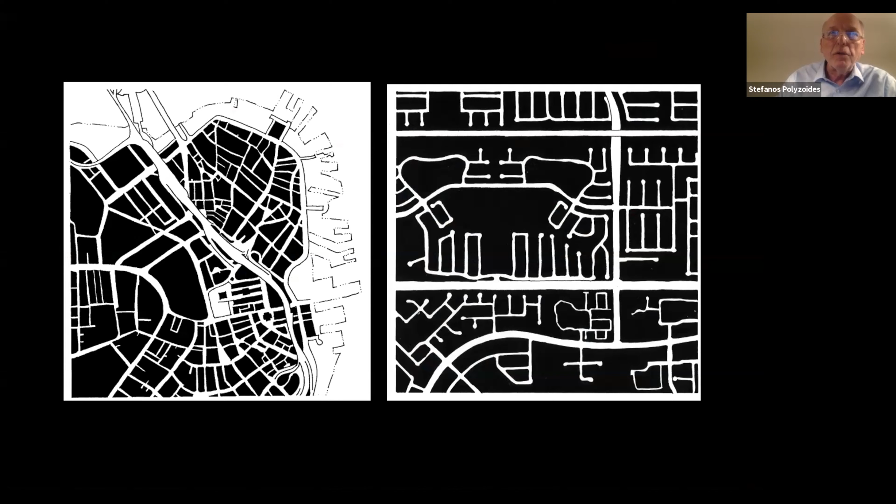So this image is 1 year older than I am. So basically our environmental issues, challenges, opportunities, and disasters in the United States are as old as the oldest people in this room today. This is an important vision, which was very rudely upset by a number of developments in our society that had to do mostly with cheap money, fast construction, emphasis on moving, abandonment of cities, bias of all kinds, and the making of cities that are not meant for human habitation.

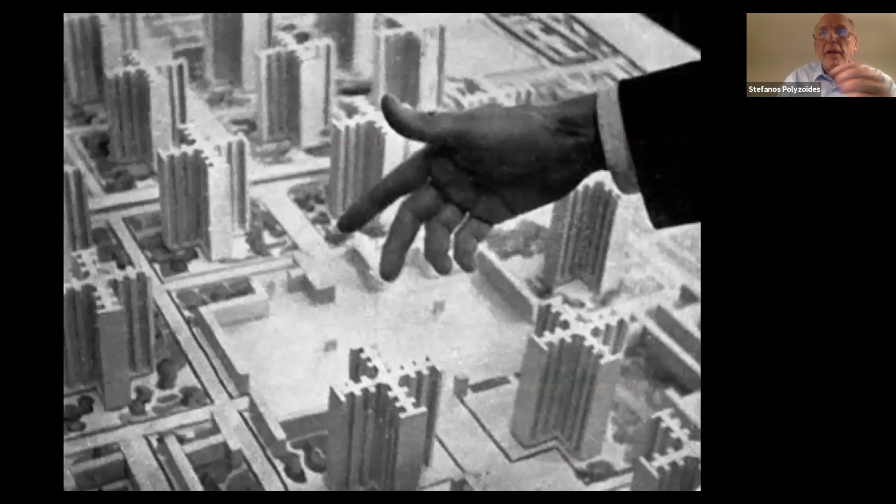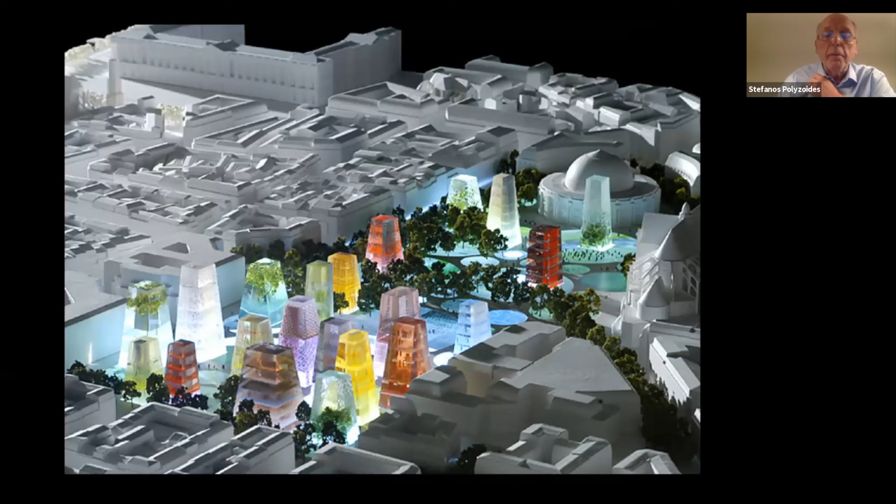What we're left with, I think, are the derivatives of this process, and our cities, which are mostly made by housing, are given now to us in this lowest common denominator form, which is the 4 or 5 story wood frame over parking, the same everywhere, continuous walls, windows defining bedrooms, bathrooms, or living rooms, total repetition horizontally and vertically, the same everywhere, from Maine to San Diego and from Florida to Seattle, the same buildings everywhere, a complete destruction of the notion of special character and special place.

On top of that, we have this kind of problem. For the architects, you know what that means. And this has given us a very uncomfortable state of affairs to deal with. There are a couple of very disturbing residual aspects beyond the economic formulas that have given us this very abominable way of housing people. And that is really single use zoning, Crayola zoning, as we call it, zoning that has to do with a non-definition, avoidance of the notion of physical space.

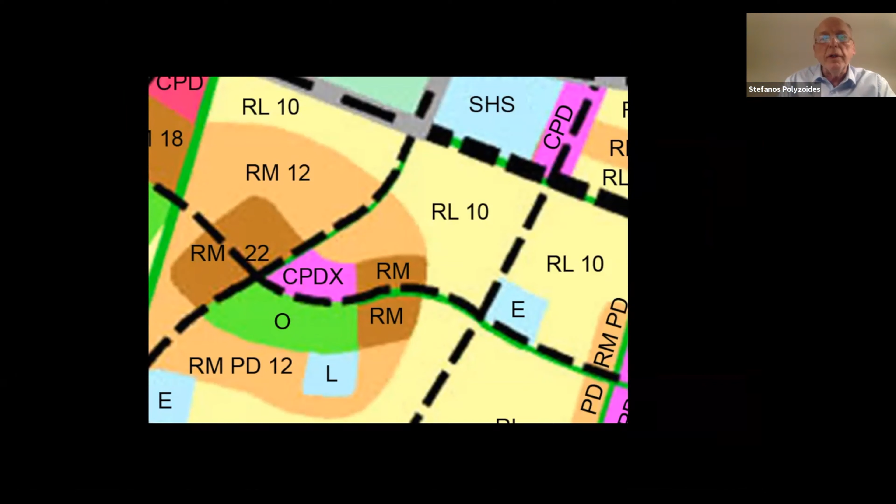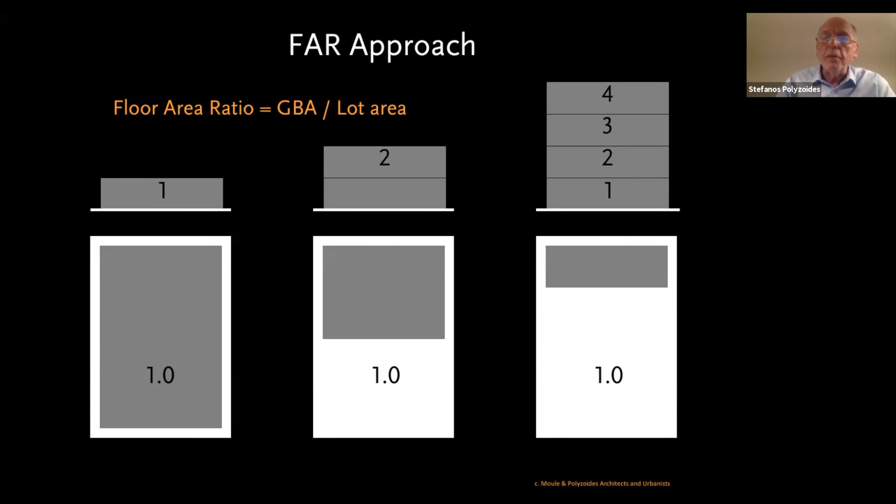And then the issue of FAR, the making of buildings in cities which are generated by some kind of multiple of the area of a given lot. It is a very unarchitectural and very disturbing and destructive way of making cities, because these two buildings are of the same FAR, 1.0. It so happens that one has a much bigger site, and the other one has a much smaller one. So because FAR is given proportionately to sites by the actual acreage, what comes out of them is completely disconnected from any sense of physical reality, continuity, or relationship between pieces that are adjacent to each other.

Enter the new urbanism, a reform movement of the last 30 years, which has delivered some very powerful and terribly important and useful tools. The Transect is an important tool because it claims that there are qualities of place that exist and can be emulated. In other words, what is in place as character needs to be identified, and needs to be the DNA according to which a place needs to grow. And it can grow by being densified, by continuing at the same level of complexity, or by proceeding into a different kind or state of city.

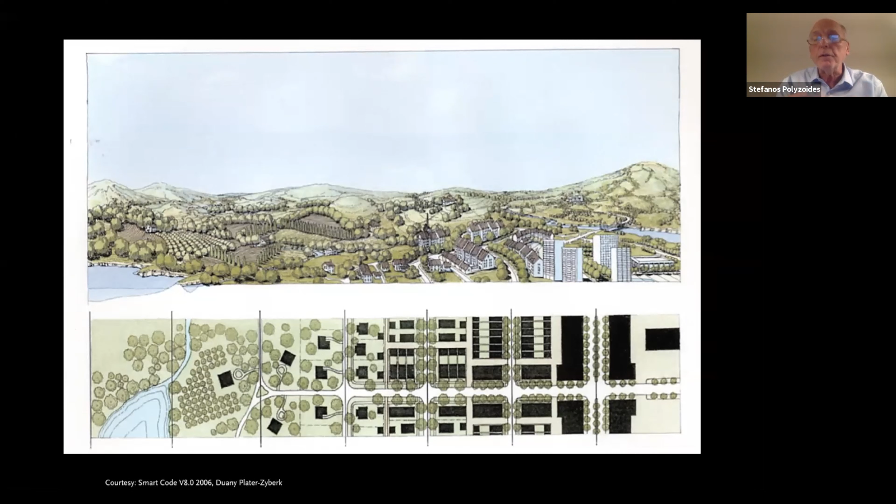But in all cases, there are limits in the way in which buildings, open space, landscape, and infrastructure come together to give different kinds of environment, from metropolitan centers to city centers, to city neighborhoods, to town neighborhoods, to village neighborhoods, to rural neighborhoods, to scattered buildings in nature, and essentially nature and conservation. And of course, there are many more refined versions of these kinds of zones and levels of intensity, but by and large, it's a reminder that you don't throw high-rise buildings in the countryside, as you see in rural France, Germany, and Italy, and other European countries these days, or in Japan, China and other Asian places. The fact is that there has to be some kind of relationship between the way in which buildings, nature, and everything that happens in both of these places actually come together in some form that is more positive.

We are heirs in this country to a most extraordinary millennial urbanism that begins in ancient Greece, and this urbanism ties right of ways to blocks to lots and buildings, and buildings by type to these lots in such a way that we're capable to make an urban fabric that is related to the repetition of these types.

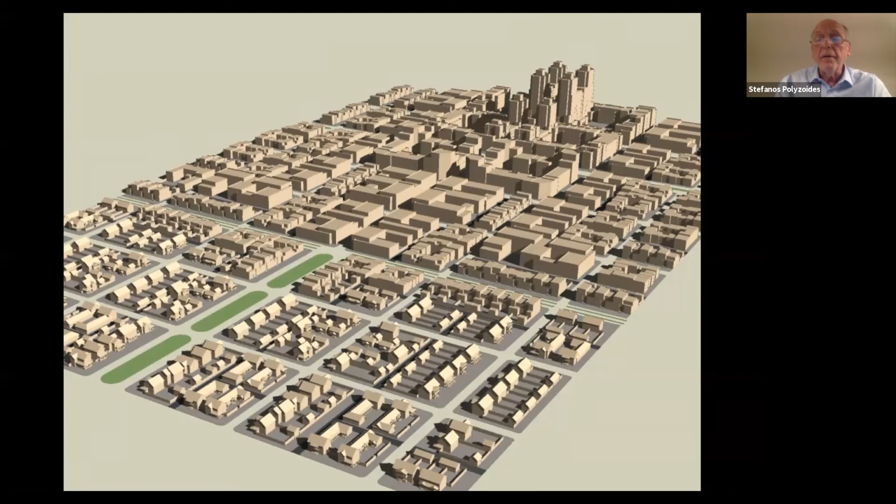This is a really wonderful, simple diagram of the common American city circa 1950. That's more like it, where you can see the densities of 2 to 8 dwellings per acre on the edges, then 10 to 20, then 20 to 50, and then 50 to 100 in the center. This is one of maybe eight parts in a typical American city of 50 to 100 years ago. And it is this kind of city we've violated through the issues and the means that I alluded to in the beginning of my presentation.

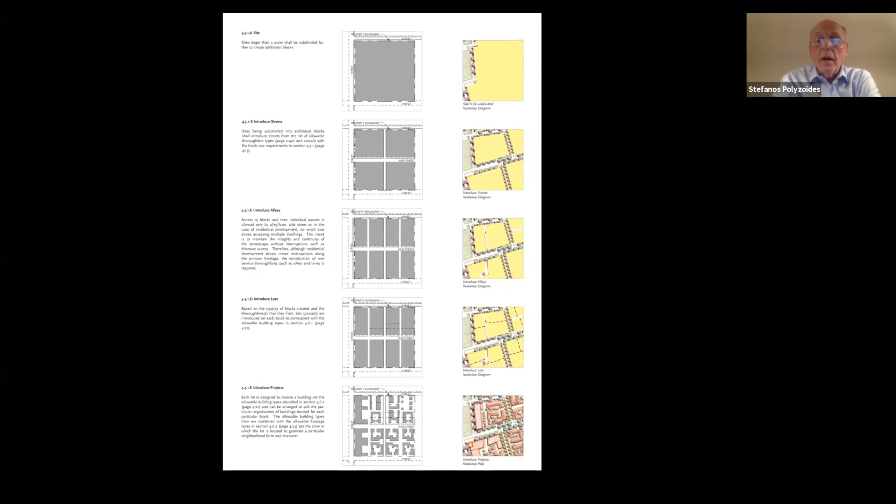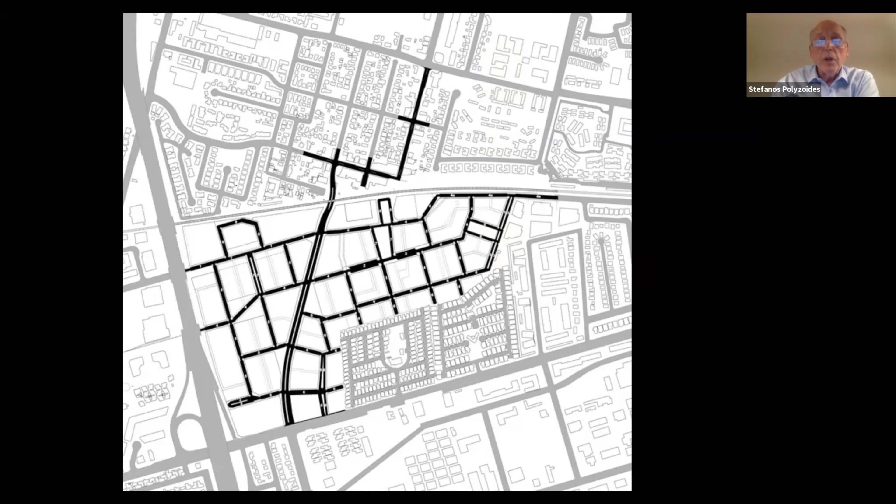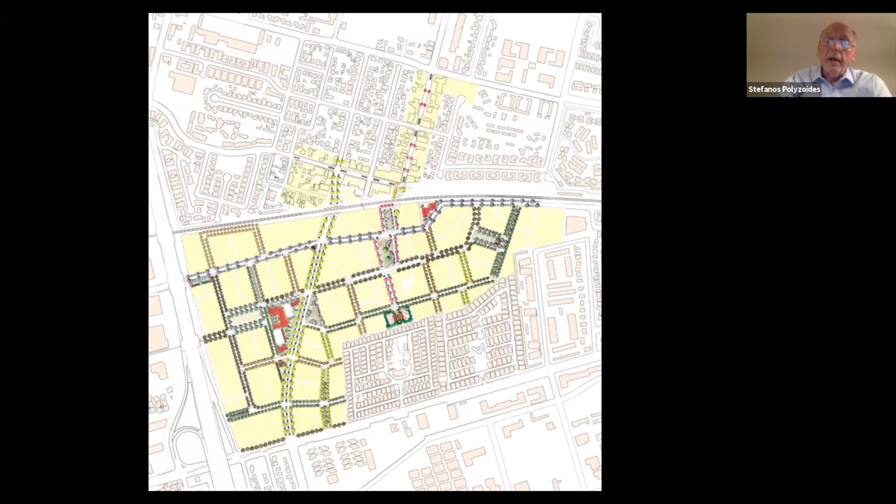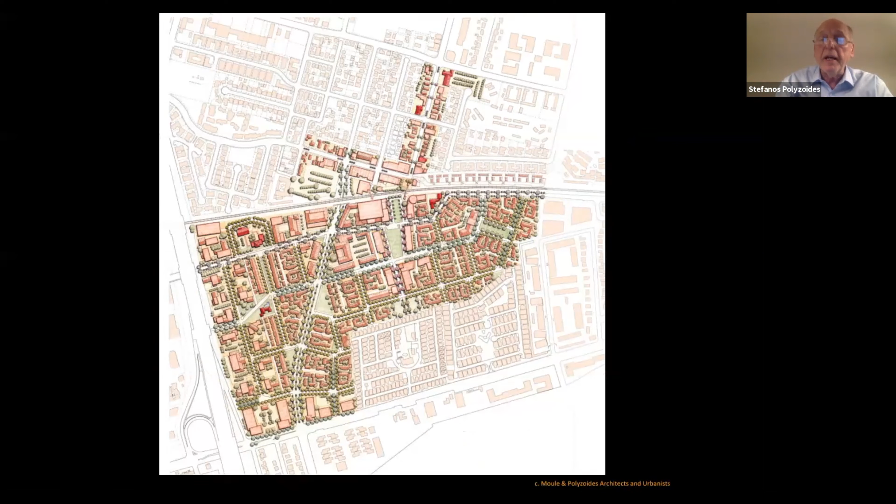We know that the important tools that we have at our disposal, and which we are rediscovering, is how to subdivide space that's given to us in the terms of traditional urbanism. So we can take a piece of land, we can introduce streets and alleys, we can plant it, we can lot it, and we can introduce types, so that in this very simple way that you can see in a recent project of ours, you can introduce a grid into a city, streetscape it, give it public space and infrastructural ecological consideration in design, and then introduce types and make a wonderful fabric of a kind that used to be given to us automatically and has completely escaped us in the last few generations.

What is most astounding for all of you who I'm sure have traveled widely, is that in the whole world, under the current means of conceiving buildings and cities, every city in the world is beginning to look like every other. The city of freestanding buildings destroys any sense of uniqueness in culture and place. And we know actually that the very simple millennial method of street, block and building I've just outlined has given us every single city in the world being different than every other.

So on the basis of this very simple idea, you can see what Rome looks like, what Quito looks like, what Fifth Avenue in Manhattan looks like, what Pasadena looks like. These are the same ideas or the same ideals of town and city making, the same system of understanding circulation, I mean mobility, I should say better than circulation, mobility of all modes, the nature of public space, the nature of buildings.

So it is a miraculous state of affairs that we have suddenly discovered 30 years ago, that we can actually return to this, that the way in which modern urbanism came to us in the 1920s and the devastating effects that it's had is an aberration. And that we can actually return to a way of making projects and thinking about the future in a way that's more like the kinds of places we love than the ones we've lost in the last period of time.

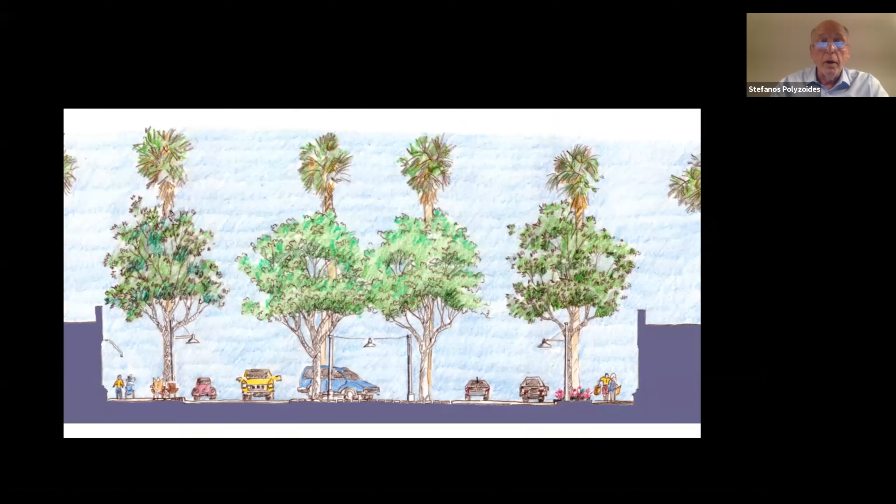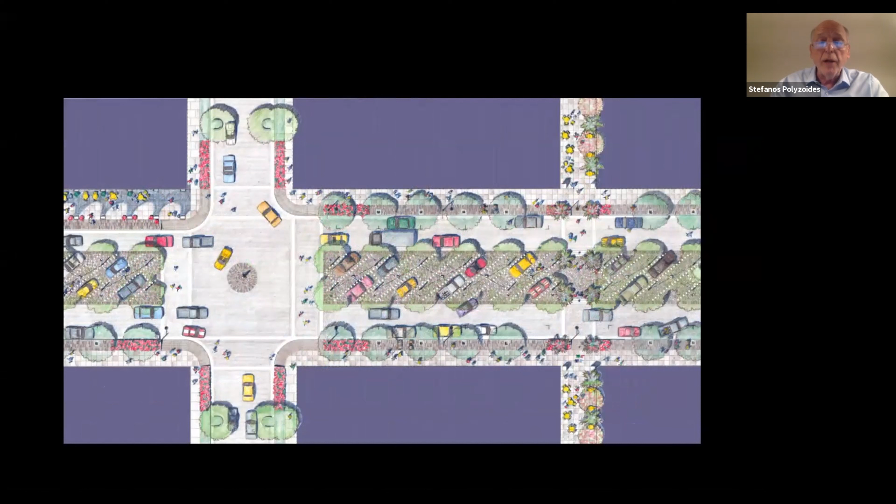Examples. First, public space. This is a 6-lane, extraordinarily ugly suburban main street in Lancaster, California. It is being reduced from 6 lanes to 4. One lane parking, one movement on either side of the street. A Rambla in the middle with diagonal parking on weekends and evenings. Various ways of planning it to accommodate a busy afternoon or evening over a weekend, a day farmers market or a parade on the 4th of July.

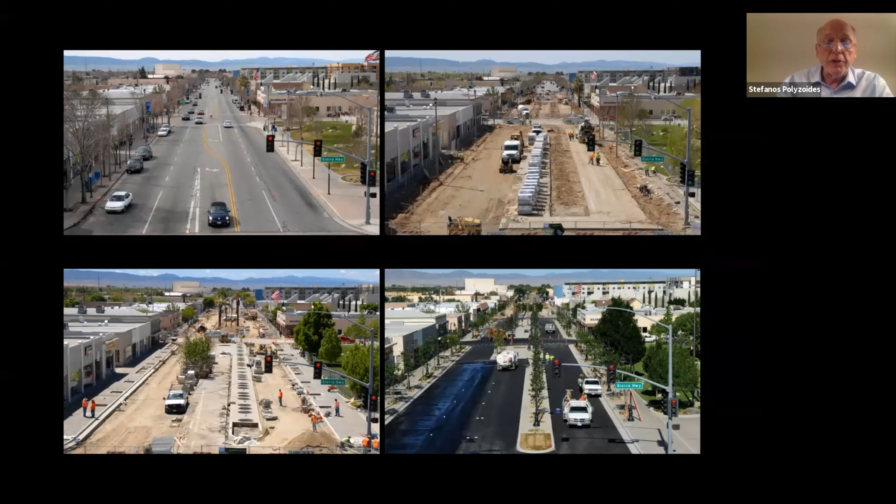And then a simple way of understanding how this could be refined and reconstructed, transformed into a real place for the middle of a town that had no place. And so after about half a dozen moves, you can get from the plan of the farmers market to an image of it, and eventually to the reality of it. This is a photograph of a 9-month reconstruction of this place, and this is it about 3 years ago, and the first time in the history of this town where they had a Christmas celebration was when this Rambla was finished.

And it is important for you to keep in mind that public space is really an important part of our daily lives and of our culture, of our way of being with each other, of the way of organizing, the way of expressing ourselves as citizens, politically, socially, in every way. But if we don't have it, then we don't have a public life. And this is exactly what is happening in American suburbs and has been happening for the longest period of time. So these are people celebrating in many ways the fact that they're now part of the American mainstream.

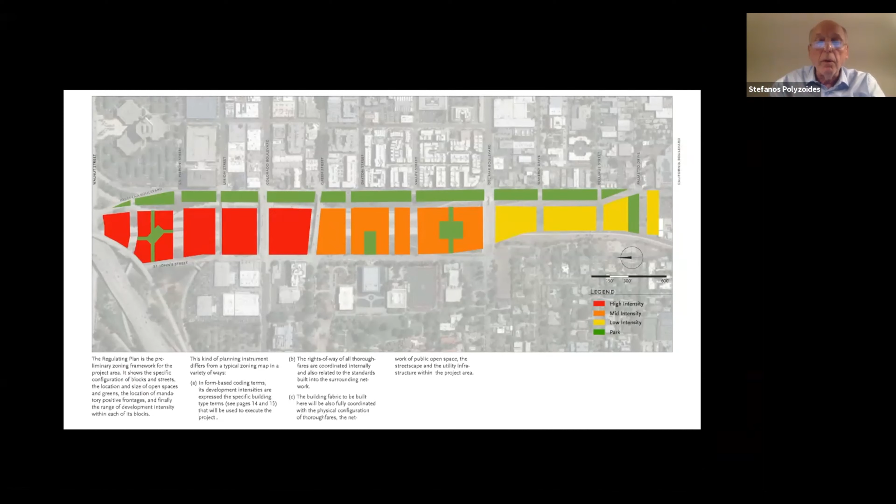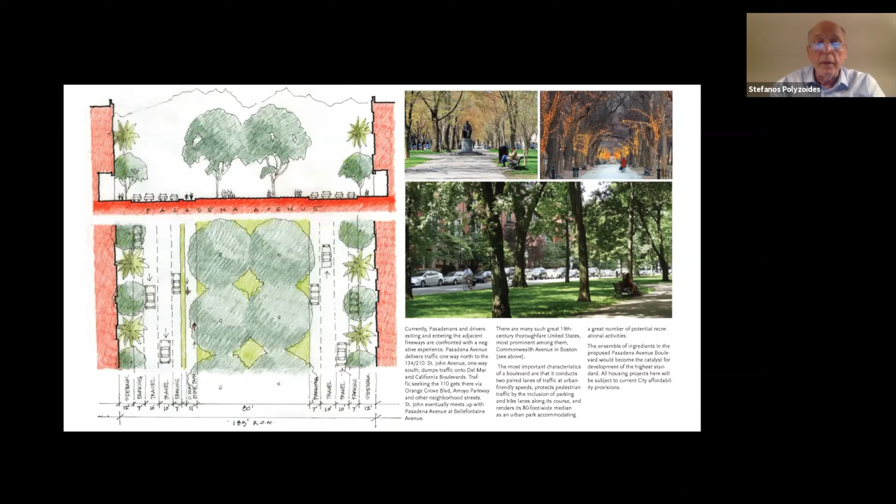This was the simple intensity diagram of development by the citizens. Red, ochre, and yellow, obviously 3 levels of intensity. There's a wonderful boulevard that is organizing the access from the city to the freeway now that the freeway does not come into the city. This is the nature of this majestic boulevard with the mountains in the background. It is as big and important as some of the great avenues in the country. Commonwealth Avenue in Boston, for instance, approximates this dimension, a grand place. And we've come along as urbanists and architects in understanding the nature of a traditional city, that we can then draw a project that replaces the freeway without actually having designed the buildings in their entirety.

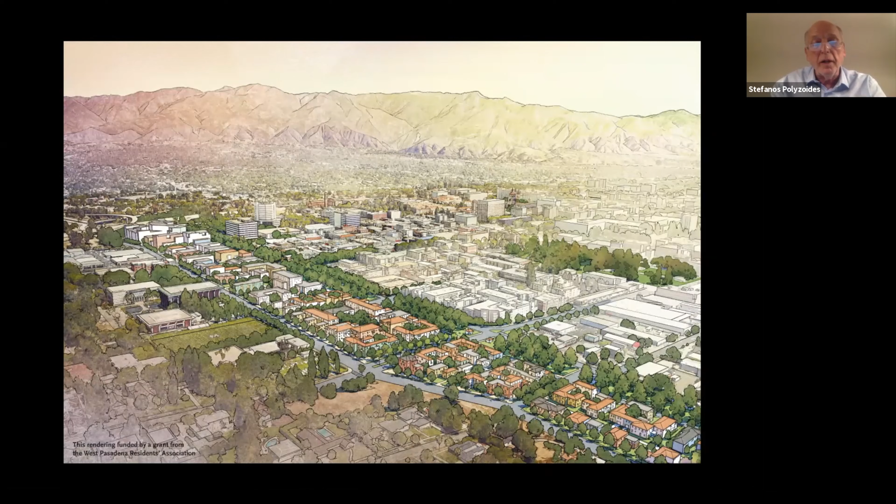And it's not that the buildings are not reasonable. They're reasonable because we've built them. We built every one of them individually so that we can predict them. And in predicting them, we can actually convey to citizens and politicians the way in which these kinds of places can be transformed for the benefit of human beings, as opposed to the benefit of moving cars.

The thing that changed the story here was that 1 acre of land, I'm not exactly sure what 1 acre of land is worth in downtown Santa Barbara, but 1 acre of land in downtown Pasadena is worth $10 million. These are 67 net acres of land for a price of approximately $670 million.

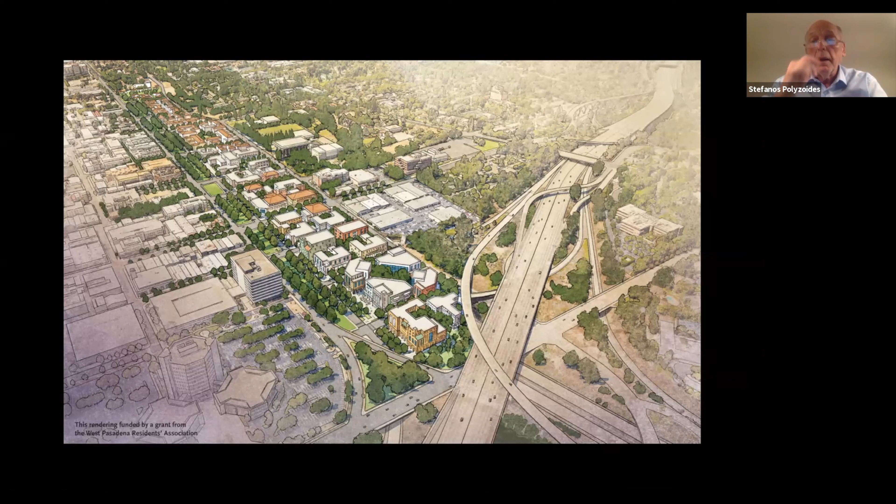When it became very clear what the net gain to the city might be through the development of this process, minus infrastructure, construction, et cetera, probably a $500 million gain, that changed everything. Then the city became the first advocate for this project, and in the last year, this area is being returned to the city, and we're in the last moments of that transaction.

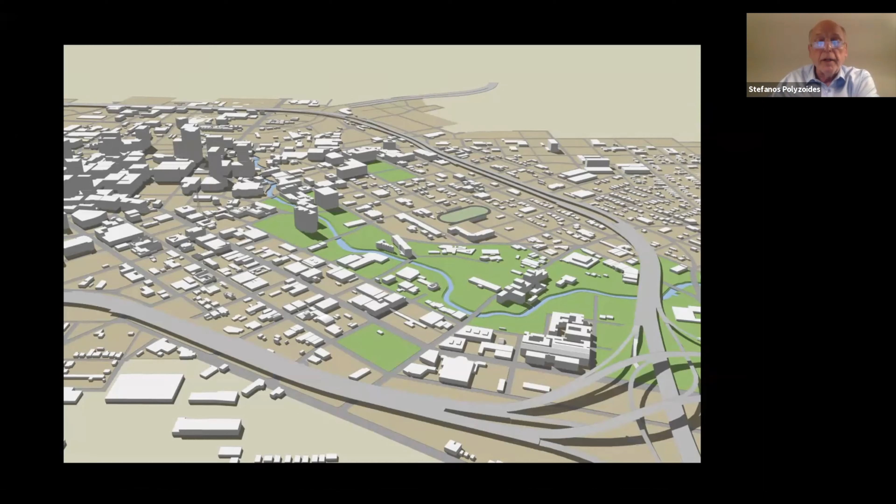We've also been very active, not only in our firm, but as urbanists in general, in reconstructing and reclaiming neighborhoods and districts. This is a very, very beautiful project of ours in San Antonio. You can see the extension of the River Walk, the blue line in the middle. The River Walk is in the downtown area to the left. This project took the River Walk from the center and extended it all the way beyond the freeway ring of the city, almost 2 miles.

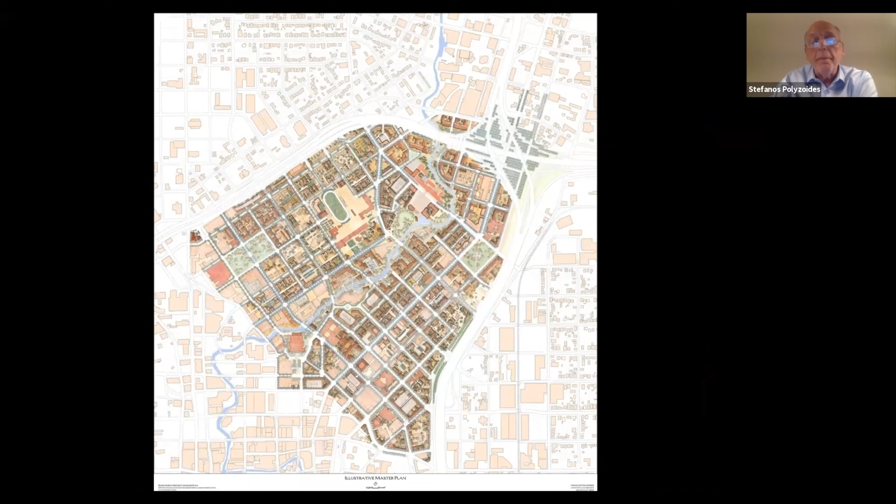It's one of the greatest projects of public works in the United States, well worth a visit. You can actually go by boat up and down this project. It has a relatively strong code. It's Texas, so there is no such thing as strong codes.

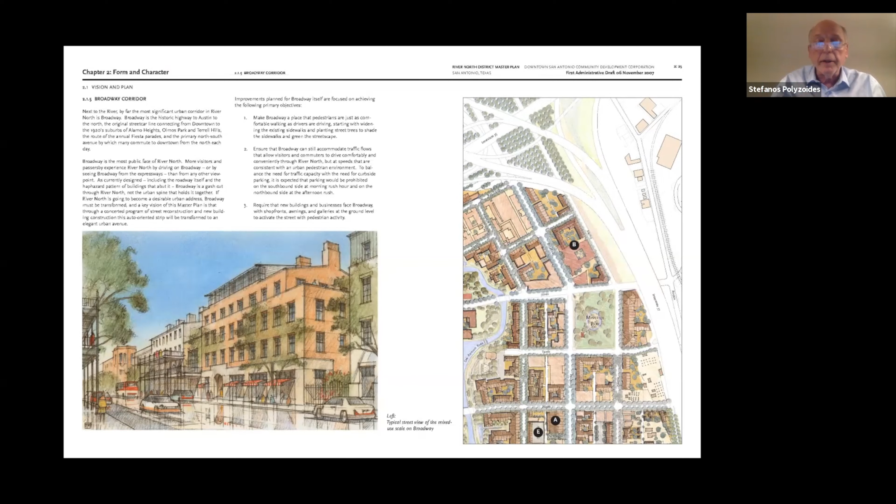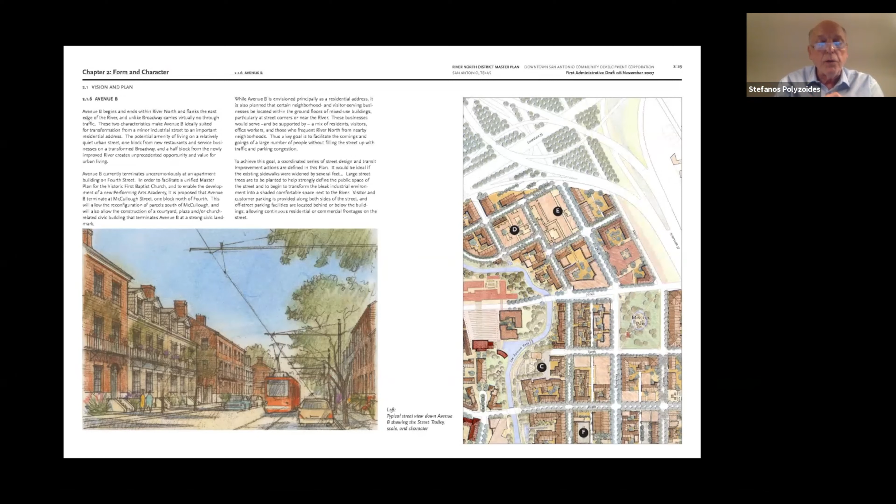But the idea was to give the citizens a handle about the difference between making buildings on certain streets of a certain intensity, as you can see, very highly connected to the architecture of that place, and then streets parallel to the main artery Broadway in a lesser density, smaller buildings, houses and versions of multiple houses in single house form in a place where transit could be placed as well.

What was miraculously beautiful about this project, this also being Texas, which is an audacious place, is that we suggested in the course of this project that the 3 great institutions that were on this river, with their backs to the river, ought to actually open up on the river as well. So the museum opened up already based on our plan. This is our sketch from the charrette about opening up an entrance to the museum from the river.

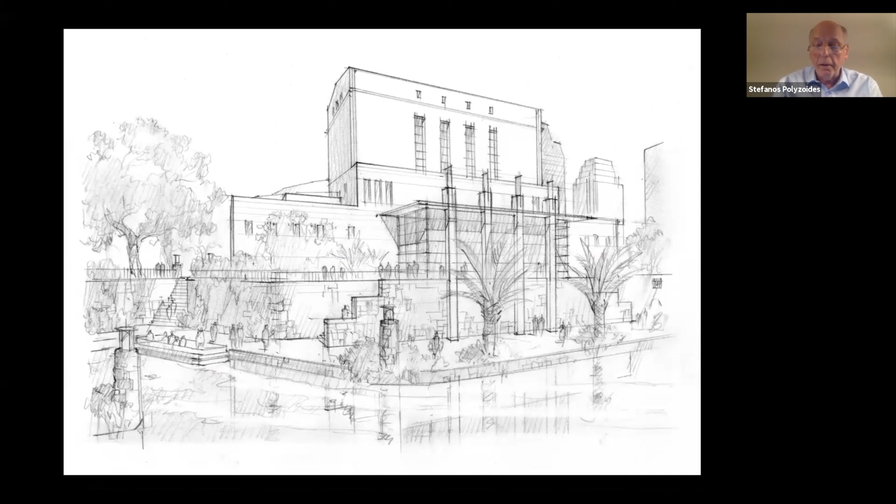And this is the Philharmonic Hall, which has been renovated with a new opening to the river. This was our sketch in the charrette of how one would get to the river.

And by understanding typology in granular building terms, one can then take a whole extension to a city like this and introduce types in such a way that one can understand capacity, street quality, infrastructure, transit, and final form, in a way that can sustain the writing of codes that can deliver such a vision to the degree possible.

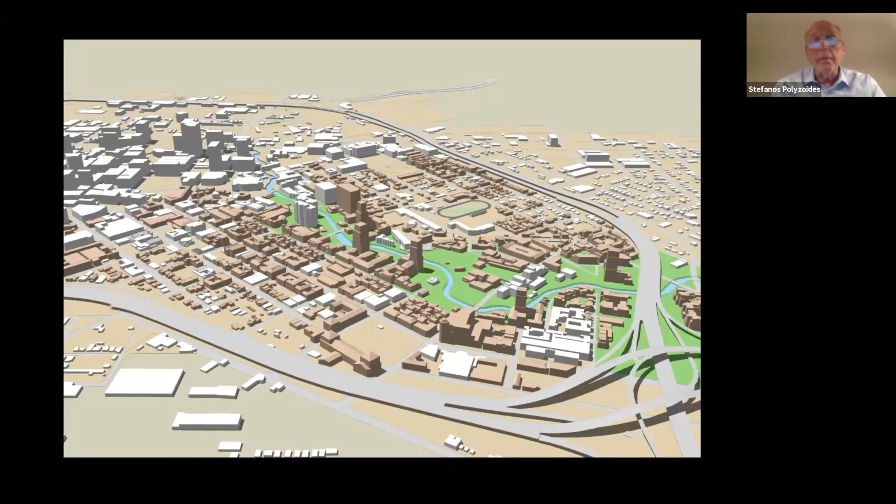In brown are the buildings to be infilled, in white the buildings that are in place, and this project is well on its way 10 years later. I want to show you a project that is actually going on right now in Claremont. It is not over by a long shot, but this was the master plan for this project.

and make the nature of the streets and the impression of fabric on the streets very, very familiar and very, very connected to a scale of city that is person driven. What is unusual about this is that we now know how to make buildings from the outside in.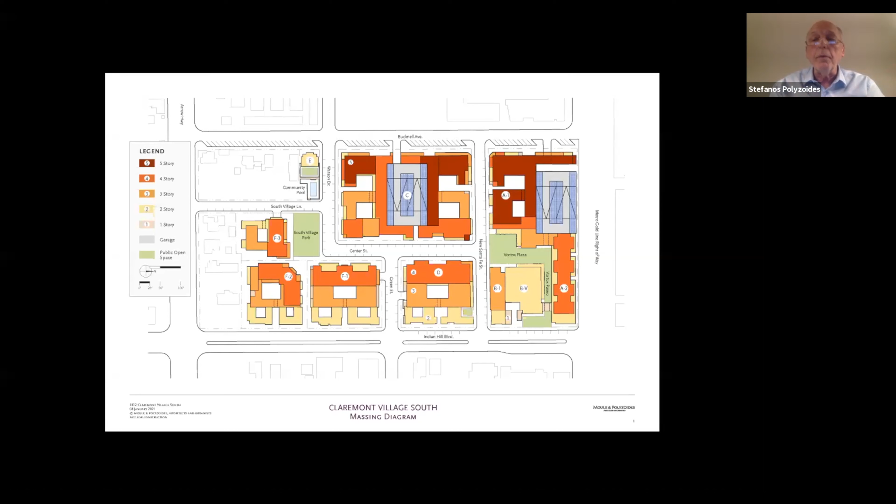Not only do we know how to make them as models at the scale you saw them in San Antonio typologically, but we can make them as architecture, because we've designed so many of these buildings that we actually know what they're like from the inside out, so we can predict them from the outside in, maybe to a certainty of probably 90%.

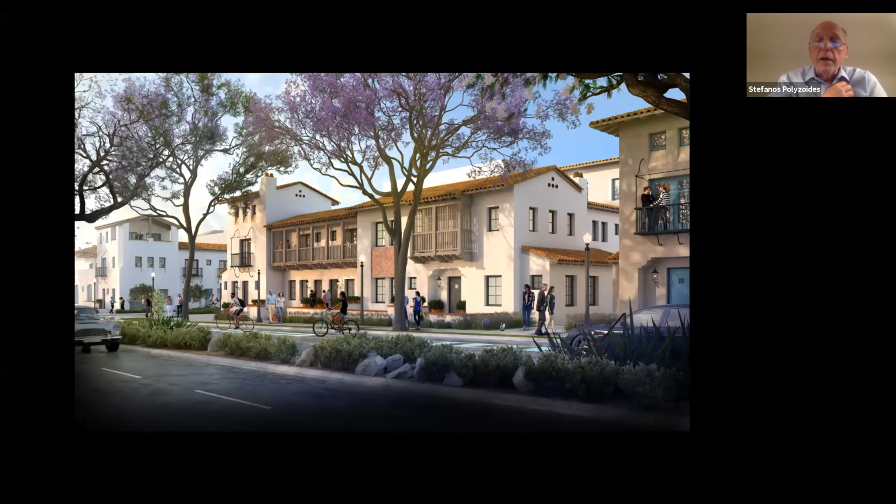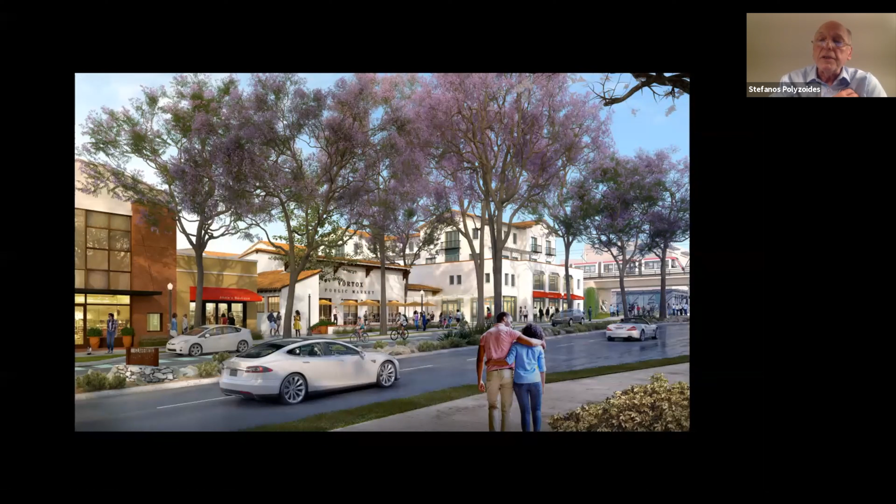12 acres is a significant size for being able to make a place like this. 12 acres is almost 6 Santa Barbara blocks. And so there is a hotel on the right-hand side with a building on top of it. The Vortex, a historic warehouse building that's opening up as a market hall. And to the left is a small commercial office building. And then a new plaza.

Again, you can imagine these buildings are designed from the outside in, but without any understanding of the inside out, other than the intuition of knowing how these buildings are built as dimensions, both horizontally and vertically, and how units are demarcated and so on.

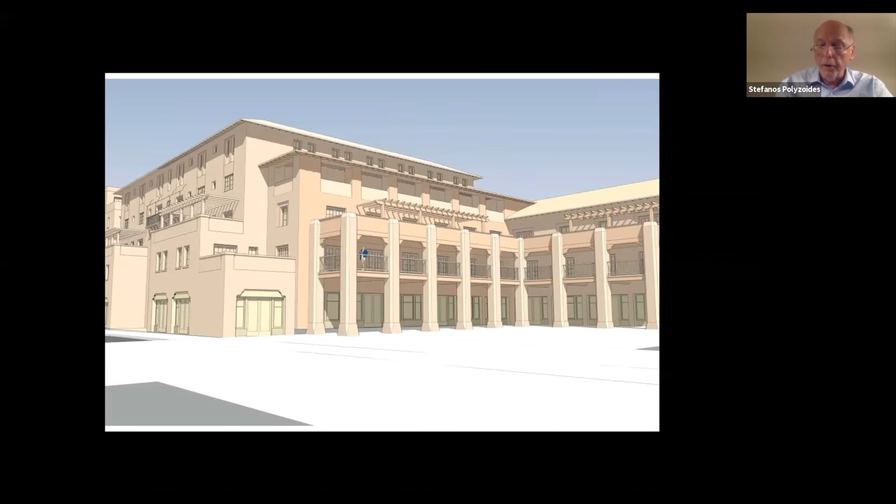So what is very important about this, which is an entire Santa Barbara lesson, as I will tell you in a second, is that this 1, 2, 3, 4, and 5 story configuration is so put together as to deny the thought that this is really a monolith of the kind that citizens detest. And you can see new buildings, old buildings, buildings of various sizes, wonderfully set back, making a small public space of a kind that does not exist currently in Claremont, which could be the new center of this college town.

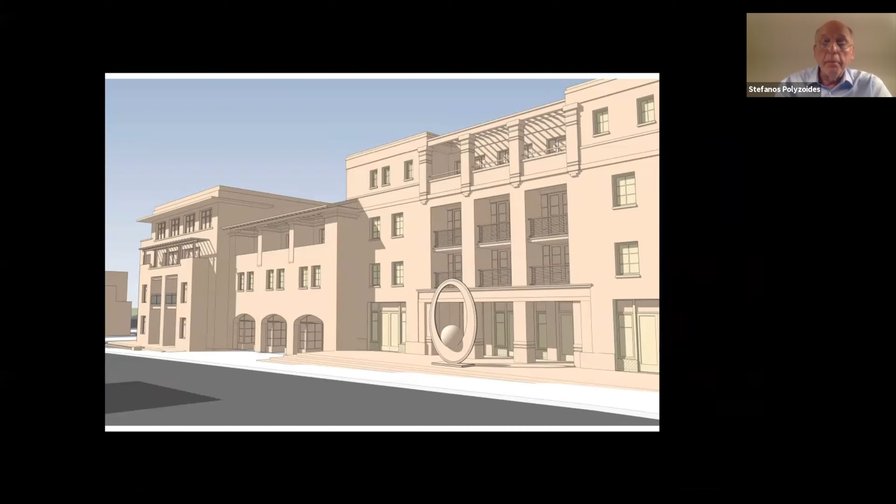Similarly, fragments of buildings on a block, making blocks in the pure Santa Barbara way with small, middle, and big pieces, and a view of the terminus of Green Street, which is the street in the middle coming laterally from Indian Hill into the site, and then a view back from the Vortex, the recycled market building, into this street that can be pedestrian and/or vehicular, bollarded at times for markets and so on.

And finally, housing in the 2, 3, and 4 story territory, broken up sufficiently at a scale that you know very well in Santa Barbara, with your most recent buildings facing onto a park and feeling just totally comfortable in this kind of environment of 2-story and 3-story buildings around it. And there is no miracle more intense really in the last 20 years than what has been accomplished by traditionalist architects in infilling of buildings.

In 1977, as a very, very young faculty member, I was 11 at the time, not really, but very young. I was 26, I think, my first year of teaching at USC. I discovered, along with a couple of colleagues, this typology called Courtyard Housing, or the court, in Los Angeles. We traced about 2,000 buildings. In 1977, as I said, we wrote a book on this type, and then it took us 12 years to persuade anybody to give us a commission to build one of those.

But we made some very wonderful studies, and we began to understand this much more deeply than just by simply observing, because we thought a lot about what this typology meant. And it begins, as you can see, from the bungalow court to an attached court, which is basically a side-by-side unit structure, attached and stacked, which speaks for itself. Hybrid court, where some of the units are walk-ups and some are served by an elevator, and double-loaded hybrid where the elevator piece is fatter and taller. And we can go from 12 to 60 dwellings per acre.

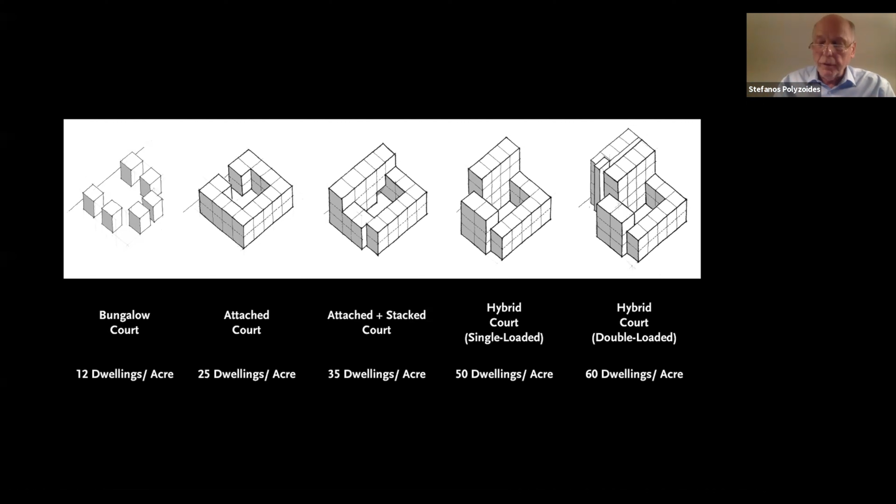At this time in 1977, people didn't know what densities meant. Density and typology had not been connected. So this missing middle housing definition began to really give architects and planners power in understanding how words and numbers connected to physical forms of a kind that could predict the form of the city.

About 20 years ago, somebody gave us a commission to do this magnificent court in West Hollywood, Seven Fountains. It was built for $170 a square foot and sold 10 years later for $1,200 a square foot. It is made of wood and stucco. It's a very simple building. It is charming. It is welcoming for people. It's diverse in units. It has beautiful gardens. And it really talks to people about how they want to live.

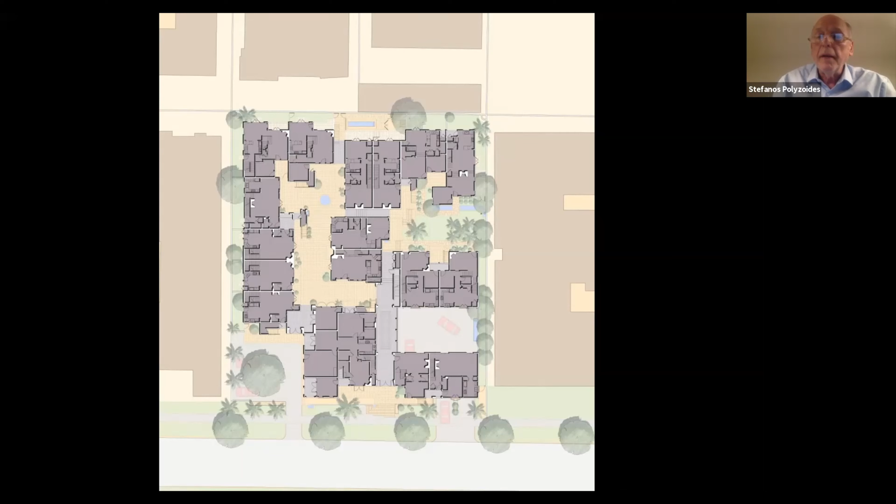And there is no housing in Los Angeles, very little of it, maybe less than 10% of the housing in the city of Los Angeles that is not single family houses, that talks to people about how they want to live. The market is completely driven. It's a zombie market driven by financial arrangements that are abstract, and no one cares about how people live. And by extension, they don't care about their money, because they're getting minor returns instead of putting money to get substantial returns that have to do with pushing the market envelope.

This building taught us a number of things. It taught us that we could put parking underneath one side of the building, so we would have, in a very narrow lot, 120 feet wide, very verdant gardens and Andalusian gardens with hard grounds and potted plants. It taught us that at 30 and 40 units per acre, we could reduce the buildings to house forms and assemble house forms in a way that the place looked absolutely natural.

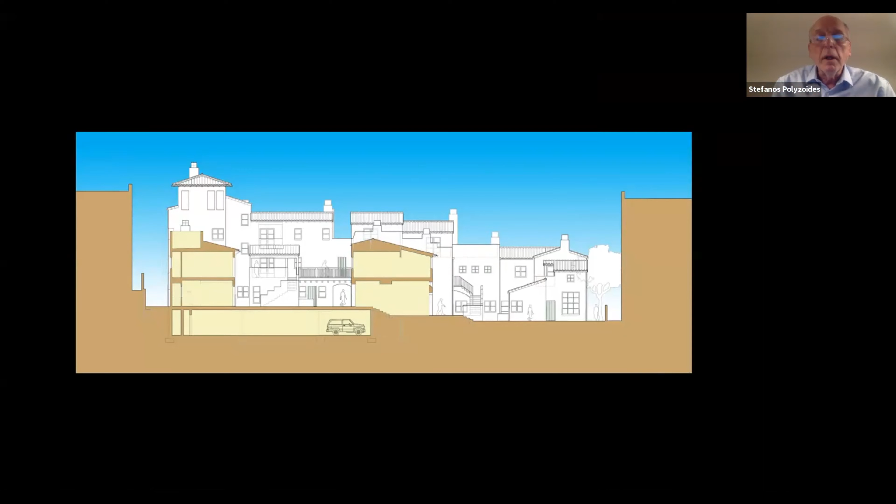And it also taught us that we could go as far as to match the intensities and the forms of buildings around us, but also provide open space and parking in places in the front, for instance, for short-term parking that were completely unacceptable by code, and by the nature of our building, we began to convince reasonable planning officials that there was a way to do housing which did not take away from the city, but gave back to the city in a way that was unprecedented and extraordinary and needed to be taken into account.

This developer, by the way, excuse me, I have to go back a couple of images. This developer built only about 2/3 of the density that was available to him here, because this was a place where he'd grown up on these two house lots, and he made twice as much as the people next door that had used the entire intensity. That speaks for the subject of quality as opposed to volume.

This is the front elevation, activates the street, parking on the lower side, beautiful internal courtyards, the units, all of them directly or indirectly accessible from the street, the building facing the street actively. This is the main entrance. All the circulation is outdoor. There is no elevator in this building. It's all accessible by horizontal corridor and stairs. The entrance overlooks the entrance to the garage on the left, straight entrance through.

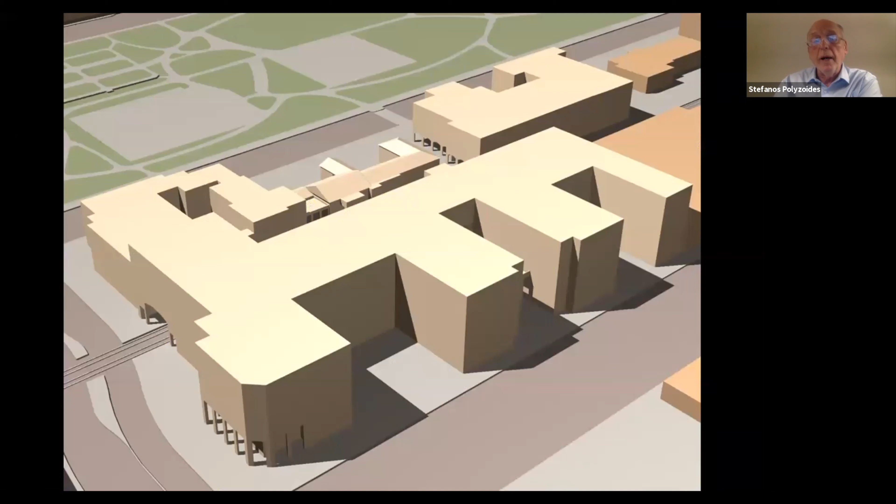And of course, under FAR, it was conceived in this way. It's a very dramatic transformation, because we took this, by the way, the low building in the middle is the old train station, 1940. So we took this very rough and very planning-heavy project, and we turned it into this by taking basically the entitlement for this project, which was 340 units, and expressing it in four different types.

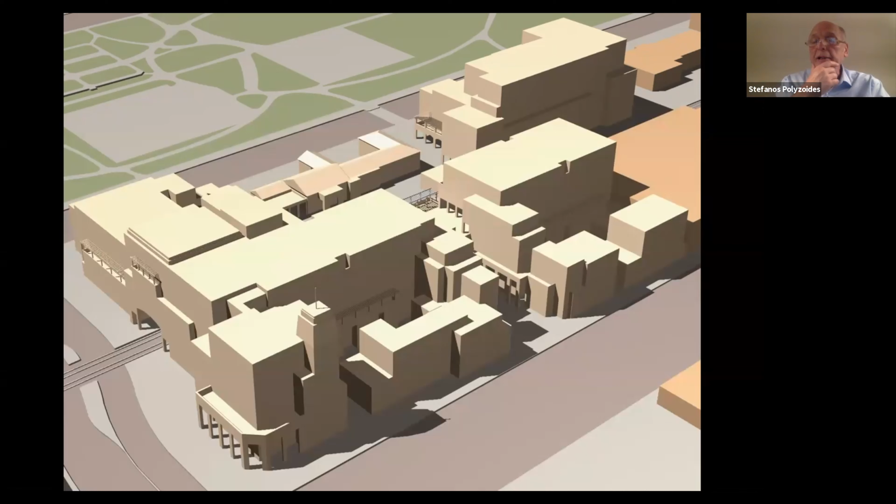A tower at the corner, double lofts one on top of the other, industrial lofts, courtyard housing to the left, and a 7-story flats building that is buried into the block in the middle. Every one of the four parts of the building has its own courtyard. On the right-hand side, it's on a second level. There is retail around the old station, and this is the project as it exists today.

Some of these units, particularly the lofts on the right, the gray building, are so successful, I've never been able to see one, because they're constantly occupied and nobody can ever get in there. The train goes right through the building. This building is really both the vehicular and the train entrance into the downtown of Pasadena. And it's really a kind of important landmark that has allowed the city to embrace the idea of the trains and this kind of density, which was unheard of before this project happened.

The second level that you see has a pool shared by all the units and has all kinds of common space around the pool. Which brings me to Santa Barbara. I'm sorry for rushing, but I really want to have this discussion with you about the future of the city. But I don't think it could be possible without your understanding where we come from as a culture, and where we still unfortunately are through the age of sprawl, and also what kind of progress many of us traditionalists have made through this last 30 years in little by little building projects and generating a world that is much more accessible, much more desirable, much more positive than the one we've seen before.

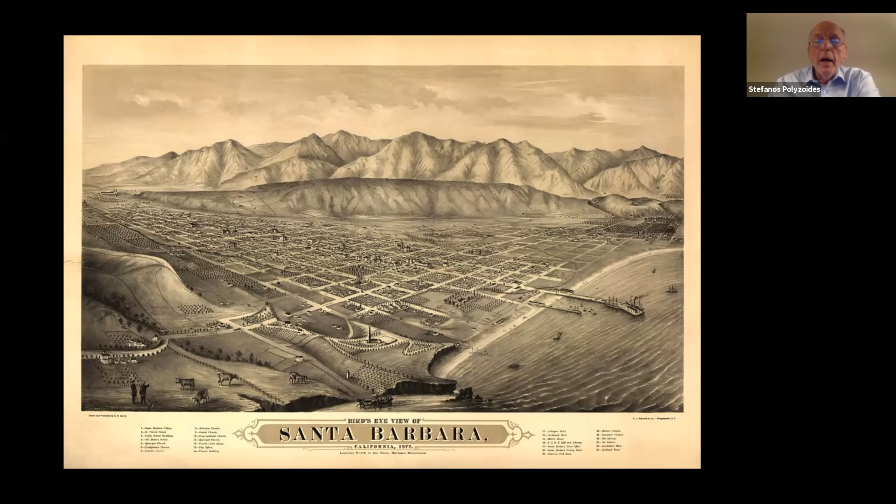So I want to show you how that kind of physical presence of this wonderful small city has come to mark my understanding, and how also it promises that its future is going to be at least as wonderful as its past, if not better, because certainly buildings are better than parking lots in my estimation, and there's still way too many parking lots in downtown Santa Barbara.

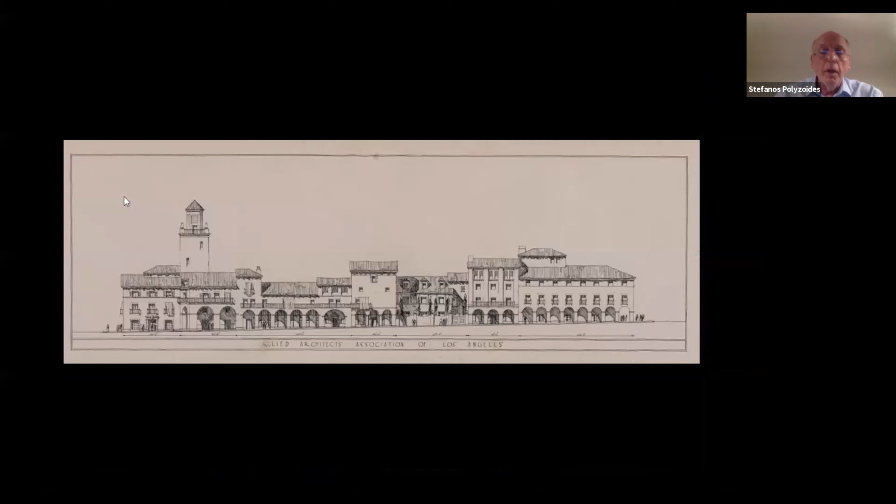The one thing that one notices from this image is how magnificent the fabric of the city is, how really extraordinary it is, and how mixed and varied it is, which might be one of the reasons why people love it so much and visit it so much, because it looks unusual and is unusual, because it has old buildings and new buildings in it. It has big buildings and small buildings, and the buildings talk to each other in a way that makes the place familiar to people. These great drawings, which you all know, by Allied Architects, by George Washington Smith, they're not buildings about style. They're buildings about scale.

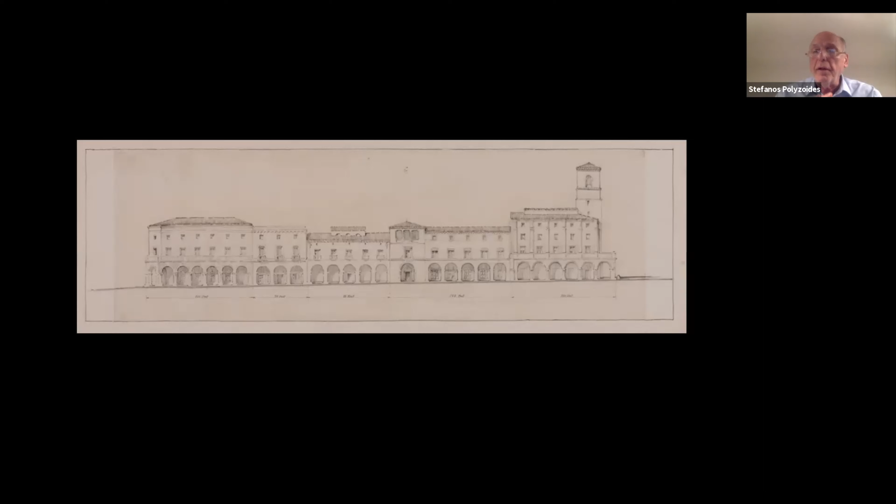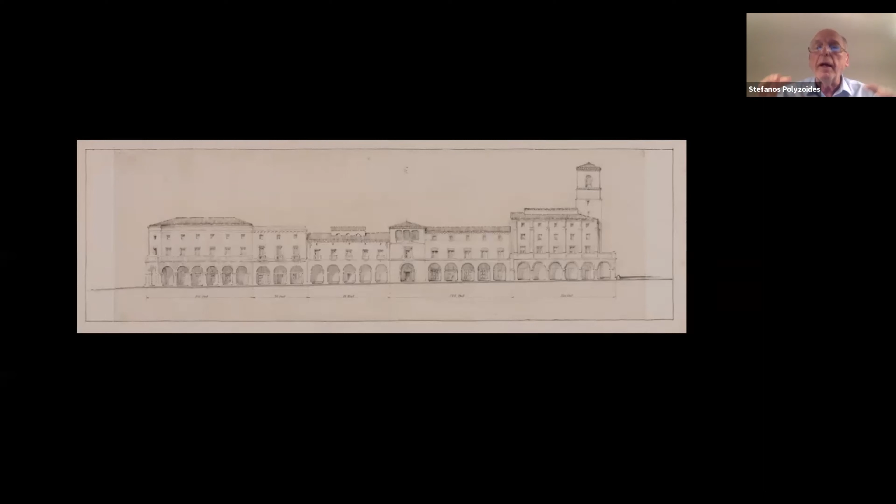They're buildings about massing. They're buildings about the way you make a city out of an American capitalist system of uneven and diverse investment that generates different kinds of buildings at different kinds of times. But when they all come together, they look like they belong with each other. That's the genius of the place, and it is so rich in transitional

relationships. I took all of the pictures that you're going to see from this point on with my camera on my phone on a Saturday morning and a Sunday morning walk of 2 hours each. And the lessons of how buildings relate to each other, both elevationally and perspectively, is extraordinary. The way in which the Paseo Nuevo steps down to acknowledge the building next to it on the right, or the way perspectively it relates to the office building to the left, or the way it steps down all the way back to Chapala.

This is not a great building, but it's a building of great gestures that over time can also be transformed to be a better object. And on the right hand side is the holy moment in Santa Barbara of the great initial adobes and the way in which they all come together with the Paseo Viejo. How the whole hangs together in that moment is probably one of the most precious pieces of architecture in our country.

And the other thing that is remarkable, which also points out the fact that this is not about style alone, is that we traditionally start buildings in design by choosing types. And we then put these types in context, we contextualize them in order to understand how they relate, what elements they take on, how these elements are proportioned, and how the scale of the whole place needs to be enlarged or broken down and so on.

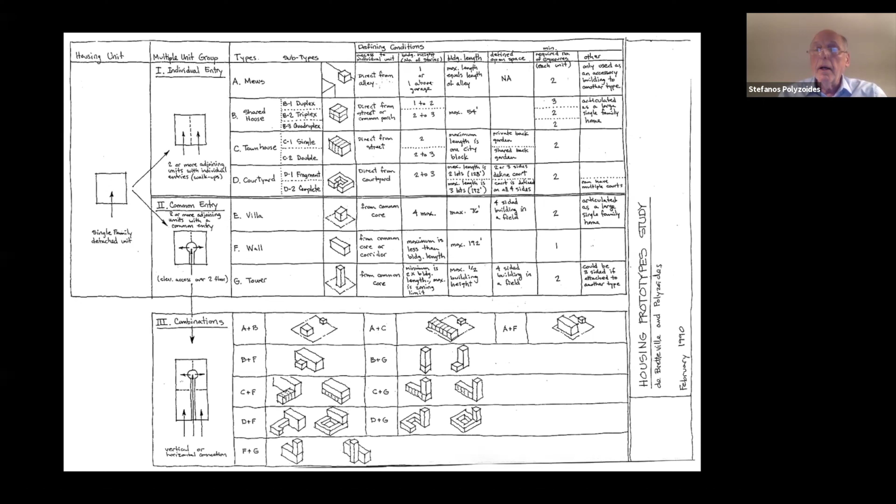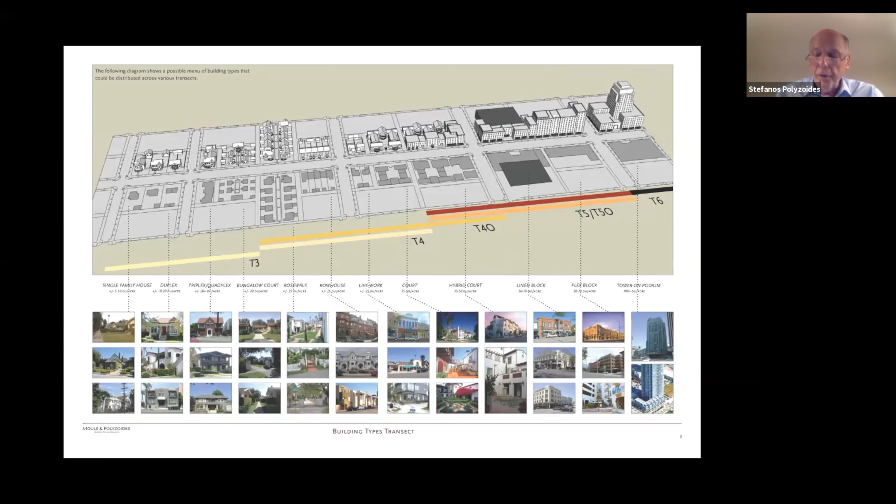One of the problems with FAR zoning is it gives the same entitlement to lots by size, and actually the smaller a lot is, the less it should have on it, and the bigger it is, the more it has to have on it. So the proportionality of building to land is absolutely totally destructive in the making of a traditional city. And here you can see all the types arrayed, of course, from low to missing middle to high, and illustrations of all of these as we've discovered them in Southern California.

But then there is this absolutely remarkable, extraordinary, extravagant way that the Santa Barbara buildings understand themselves as grandchildren of Allied Architects and George Washington Smith, in taking the tall order of facing Chapala, which is a big street, and turning the corner, stepping down, or stepping down on the creek, or understanding the form by stepping down as being composed of house forms, of smaller forms that make them look much less like inhospitable bars and much more like stacked houses of a kind that one could imagine living in, even on a fourth floor, or particularly on a fourth floor.

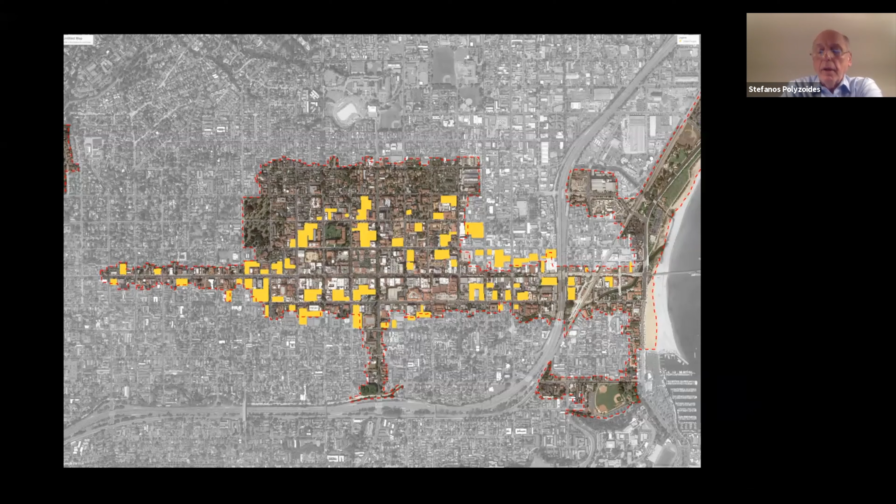And so the enormous opportunity, the extraordinary challenge, the once in a lifetime moment is how to take this land and control parking and traffic and build buildings at appropriate scales that maintain the character and the DNA of the city. And so I would say that we've done this only once, but I would suggest that this has to be tried again in Santa Barbara.

And that is that in San Antonio, we engaged a half dozen best architects in the city in a charrette to discover what the DNA is and how to infill the city, every single lot in the city, in order to understand what infrastructure would be necessary to sustain it and to write the codes that will allow it to happen. So it is a unique opportunity. There is an extraordinary architectural culture in place in your city, which can actually sustain that kind of dialogue.

It has to be a process like this, where working together, we could, for instance, infill every single place as a kind of 50-year exercise, trying to figure out how this works. By buildings of all sizes and all kinds, with a code that does not deliver a crew-cut four-story subject everywhere, but beginning from this idea of a complex massing. Certainly, the preparation of a vision of a specific plan talks to neighborhood and district character, to massing, size,

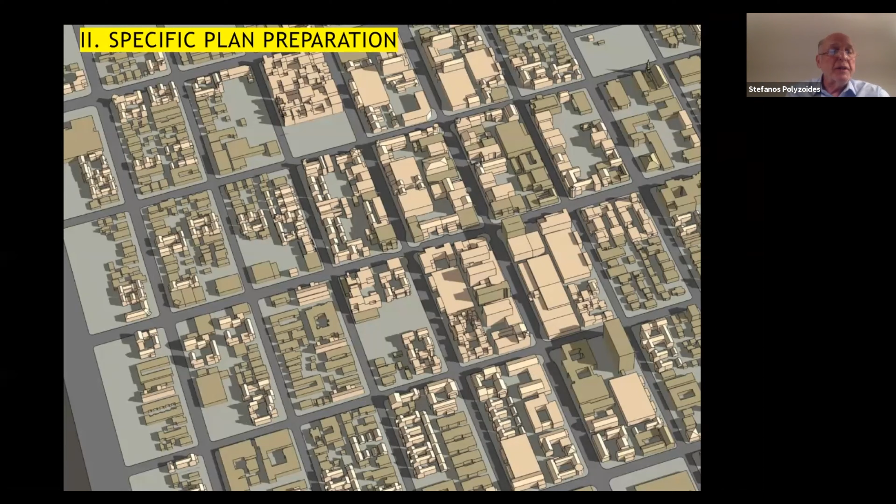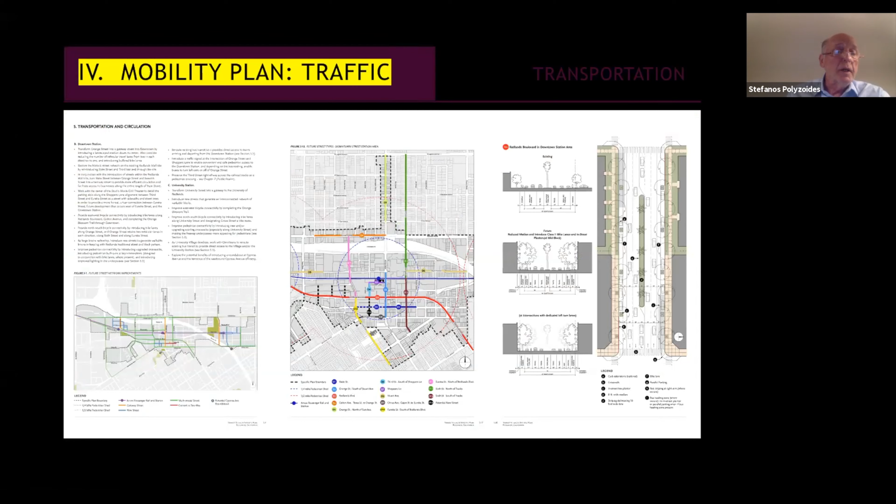capacity, special issues. The public realm talks to street types, open space types, standards, planting palettes, etc., special places. On traffic, street network and sections. I'm going too fast, I'm sorry. On public realm, planting palette in special places, on traffic, street network and street sections, intersection design, ped transit and bike plan, on parking, on-street parking, valet, Uber, loading, transportation management, etc.

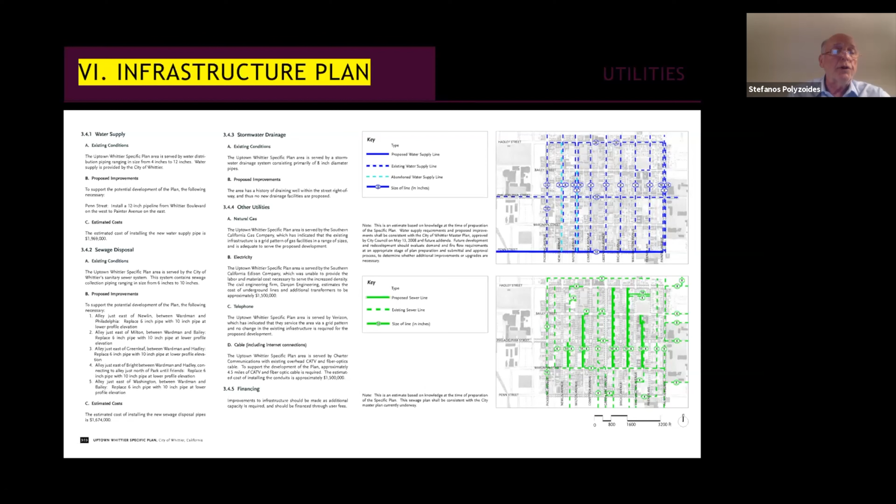On infrastructure, somehow this is going faster than I can control it. Utilities that support development and sustainability strategies, sewer, water, dry utilities, stormwater, etc. Then a code for land use, development standards, setbacks, heights, etc. Parking, design standards for building massing, articulation, frontage, signage, etc. And on specific plan preparation and final arrangements, funding for public improvements, time frame, affordability issues

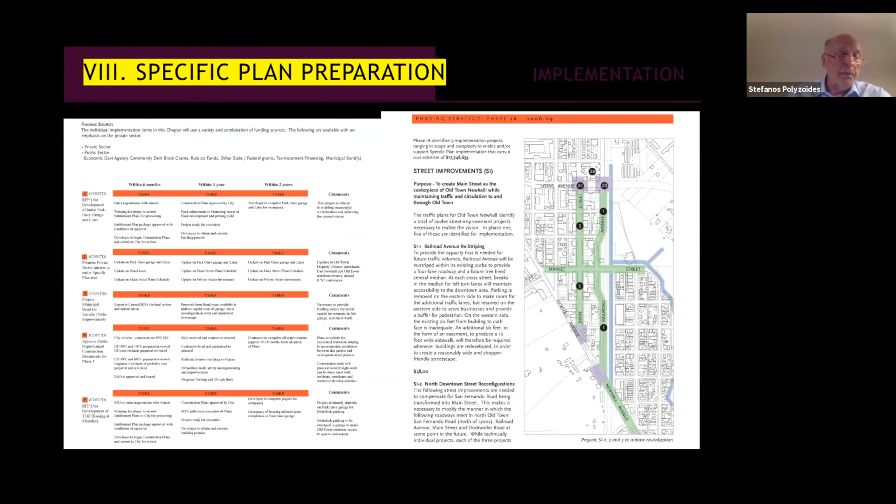related to the state with incentives, concessions and waivers, which we're fighting everywhere, and then an EIR on streamlined review for individual projects that allow easier developer activity within the downtown area and addressing the impacts of development as much as possible. So apologies for the speed.

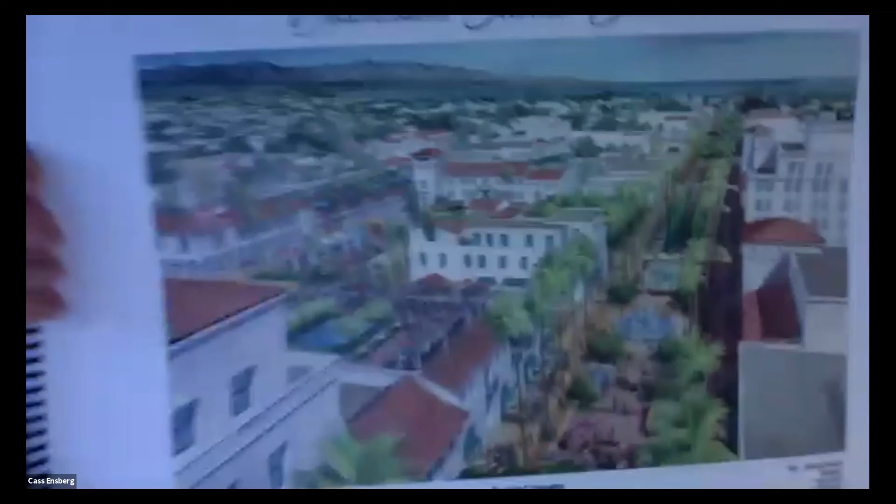I think Stefanos has explained it all so beautifully with all of his slides. He's touched on everything, including many images from Santa Barbara. And many of these concepts were what were studied in the charrette. Here's the charrette booklet. There it is. It's super thick, over 300 pages, and the beautiful image on the front that you all remember. So we really have been digging into this, and it's our architects and the design community who have the skills to do this.

You'll all remember that in 2017, we did a charrette on this same topic in November, and right after that, the Thomas Fire happened, and then we had the mud flow, and so that was the end of that year. And yet we're still struggling with housing and vitality, with the issues relative to the Amazon effect, as we call it, and the housing issues and environmental issues. So we've been struggling with this and trying to get the housing that we so desperately need.

So in 2019, we did a lot of work to remove some of the barriers to housing in the downtown, one of which was the famous donut hole, where we really didn't allow multi-unit housing in the downtown. And in the early part of 2020, we were able to move forward with some of those metrics; residential use was now allowed. We did some revisions to the height, the parking, and the open space to make it more able to do urban design in the classical way.